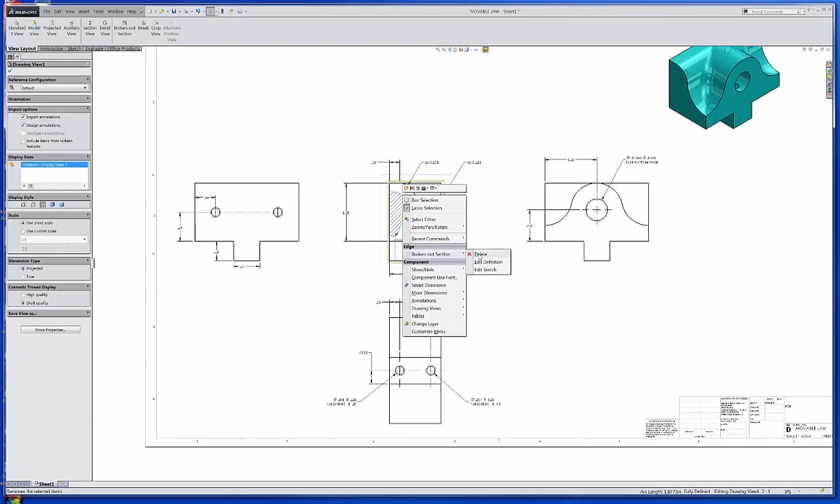So that'll take care of that, and there's a preview. And we can go ahead and accept that, because what I want to do then is I want to change this spline around a little bit. So I'll right click on that. In the broken out section you can delete it, or you can edit the definition, or you can edit the sketch. And I'm going to edit that sketch.

I want to bring that point here down a little bit, and I'm going to click off of that. I'm going to bring it down again. Actually, I'm going to click so that I don't get right on that point. And it should get all the points again, and I'm going to drag this one up. Okay, and accept that. And then this is where it gets fun.

I'm going to have to go in here and edit the sheet format, which messes with that whole thing. But then I'm going to right click on that again and edit the sheet, and it'll come back. Now notice it didn't change the way I changed that sketch, but if I rebuild it, it updates that. So now I can actually see in there and see that, yep, there's that flat bottom.

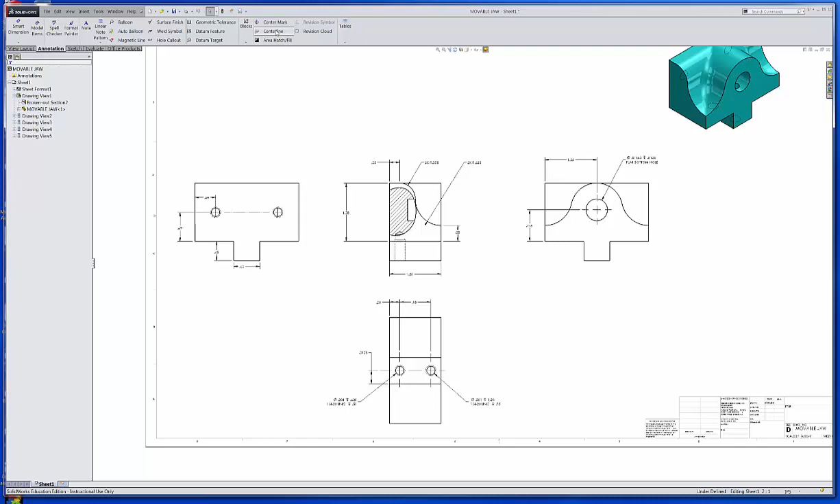So the only other thing is I might want to put a center mark in there. So I'll go to my annotation and I'd go center line here and pick this line and this line, and it'll put that center mark in for me, that center line, and then that probably should be drug out beyond that point there. So that's what I would do on that now.

And if you don't like the way that's done, again, you can just go in there and click on that line, right click, broken out section, edit the sketch, and I'll click on that line. And I don't know, let's see, maybe if we bring this, and that's moving the whole thing, which is fine, but I really wanted to kind of just bring one of them down.

I don't want that to be so rounded. Just go in here like this maybe, and I'll come up here, and what you're doing there, you can change the angle on this thing so it won't look so circular, if you will. And I want to try something here once. I'm just going to hit rebuild, and it comes back, and there you go. There's what you want. So that kind of gives you a little bit better view of that, so you can see into the part.

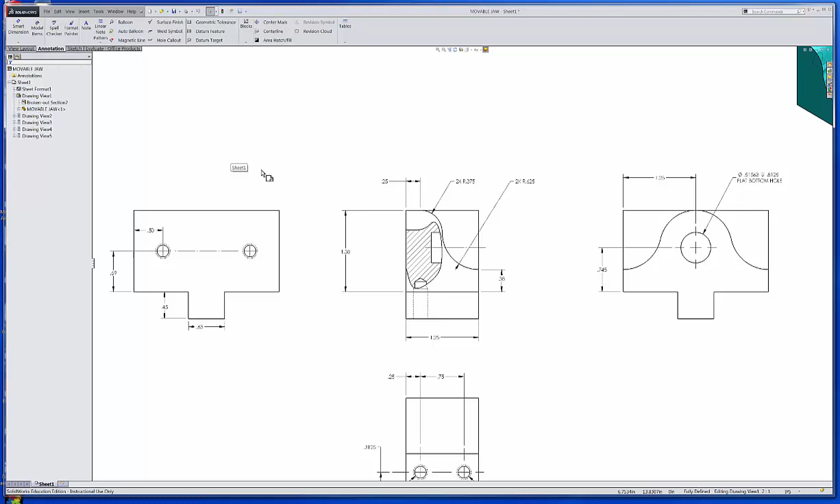So that's what I'm going to leave it at that for now. Now, and let me do just one more thing. Let's say for some reason you had to do a section cut of this piece. Oh, I don't know. Let's say we decided to section.

Well, let's just do a, okay, I'm a view, layout, section view, and I wanted to do a section, except for I'm going to do a horizontal. So over here, notice this is vertical axis. I want to do a horizontal, and I might want to pick right in here somewhere.

And actually, you could probably pick right in the center of that. But I want to come up this way. So I need to flip that. I need to flip those direction. So let's flip the direction there. Okay, and I'm going to do that.

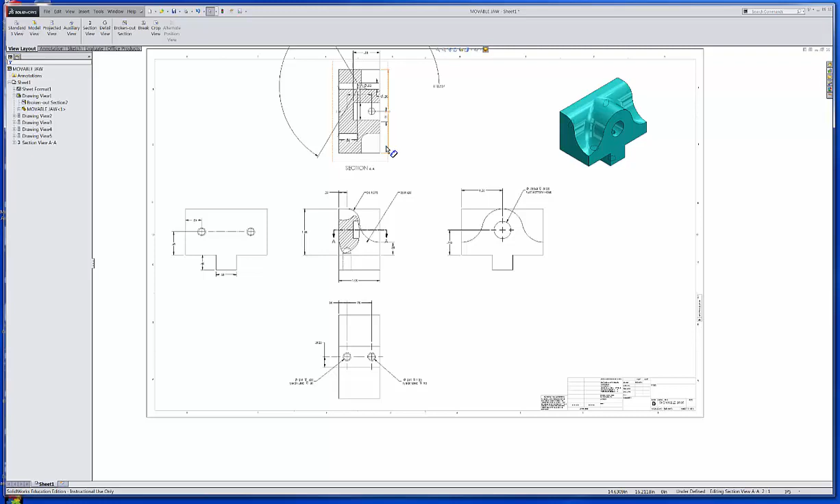So now, my goodness, look at all the different details you got there. You know, I don't need that for that arrowhead and such, or the for the drill point of that.

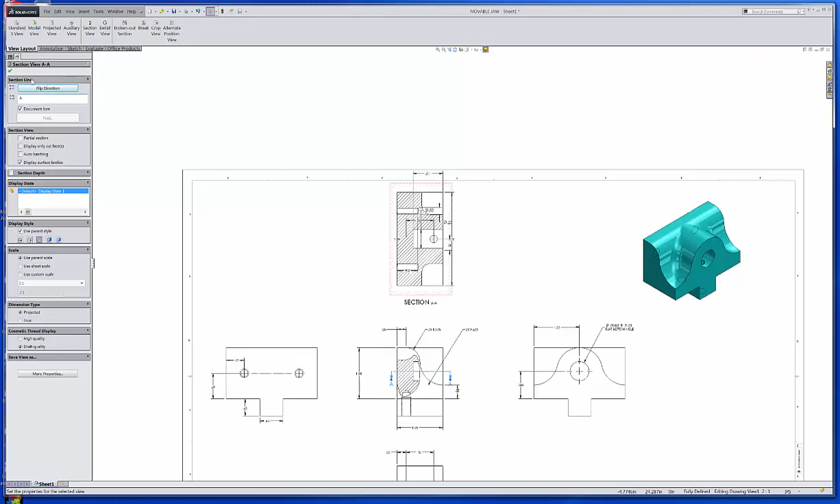And then notice I can move this up if I need to. Let's see. Let me grab that. Now, it might have locked in since looks like it locked in since I went right to that center line.

And it really wasn't what I wanted to do. That's not going to work. I need to come off of that center line. It's not going to let me come off of there.

Let me see if there's something here holding it down. I don't see it. So the easiest way to take care of that is to delete the view. I'll right click on it and delete it, say yes, and do another section view.

Again, it's horizontal, so I'll just put it somewhere in there. Flip the direction - the view should be behind the arrows. And accept that. Then, like I said, I'd take out some of the other stuff.

What I was getting there was this hole, so right through the center. Really, all I'm concerned about is that I don't need any of this stuff in there, and I really don't need that.

Most of these dimensions I don't need. The 2.5 I can leave, but I really don't need to. Or do I need the 0.81? Now, you could, if you wanted to, leave that 0.81 in there.

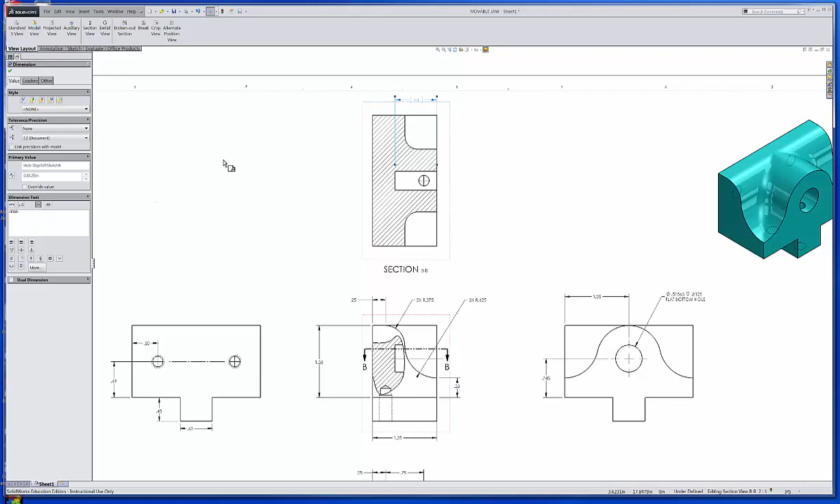Of course, you'd have to get it down below the title block and then put a reference on it. Now, there is a reference right here, so if you put parentheses around it, it makes that a reference dimension. The reason that's a reference is because I've got the 8125 here.

So I guess I ought to really make that a 4 decimal place. So I do that right there. And that takes care of that.

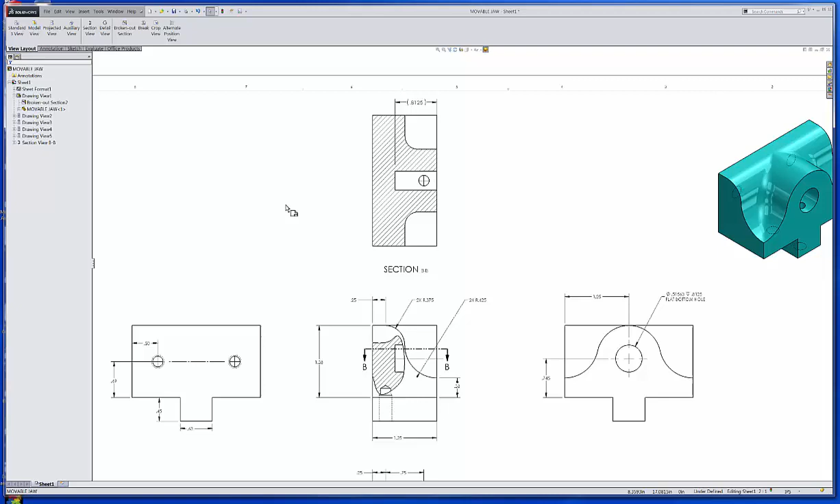Now, the biggest reason I wanted this section view is because I need to call out this fillet right here. So I would go ahead and make that a smart dimension, and I'd probably put it on this right here.

Could not be converted into a line or circular arc. So I guess I may have a little problem there. I thought maybe I could sneak that in at that location, but that's not the case.

But you can see there is a fillet here that I'm going to have to get somehow. I'm going to have to call that out.

I guess the one way I could call it out would be if I called it out just as a general note. I didn't really want to do that, and actually I think I'll leave this like it is, and we'll go ahead and show that.

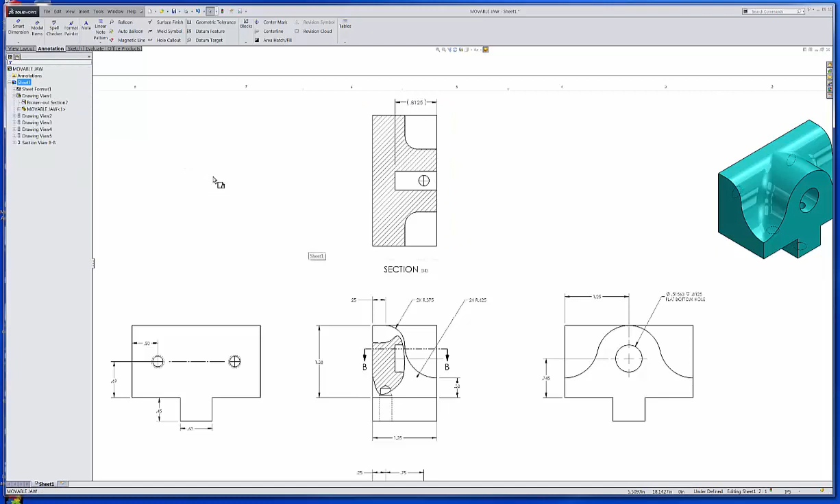Yeah, and then I'm just going to put a note over here on this, and I guess I ought to hit save here since I've done some work.

Note here on section BB - if I double click that, I really want this BB to be the same text height, so that should be 0.25.

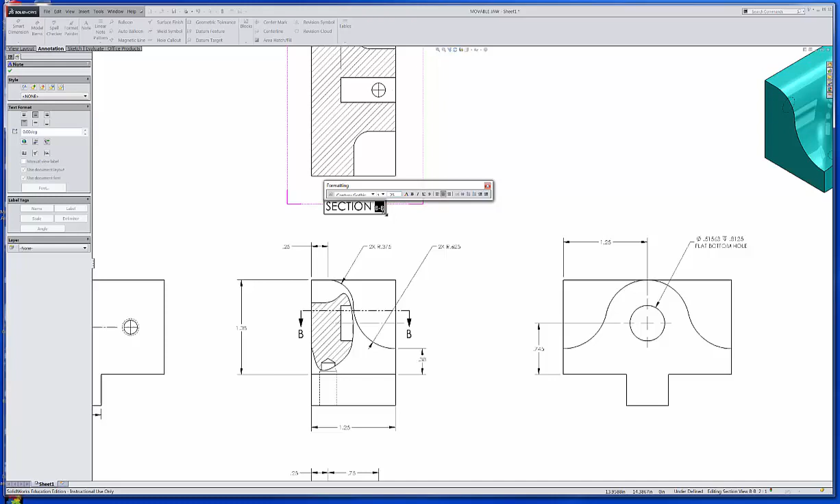Now that looks better. And then over here I might want to move this out a little bit, and I might want to move this out a little bit too, just to kind of clean that up.

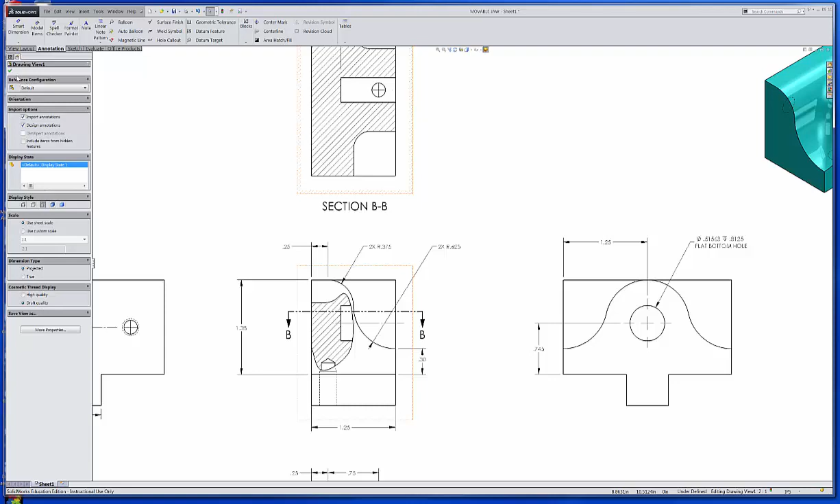Interesting that I got my hidden lines in there. I don't know that I turned that on. Don't know why that's showing up, other than the fact that I'm showing this.

So maybe what I would do then is just put in a whole note, or just some notes in general. So I'll go in here and define a block, and I can start putting in some notes.

That already came up to 156, so I'll just go ahead and type in notes: 1, all dimensions in inches, 2, and then a space or 2.

Unless otherwise specified. All fillets and rounds to be radius of - and the spacing there, I believe it was 0.125.

And then usually we like to put a note in there: break all sharp edges. That just tells people, okay, you really need to break all the edges. You don't need to do too much, but just hit them with a file or a deburring tool.

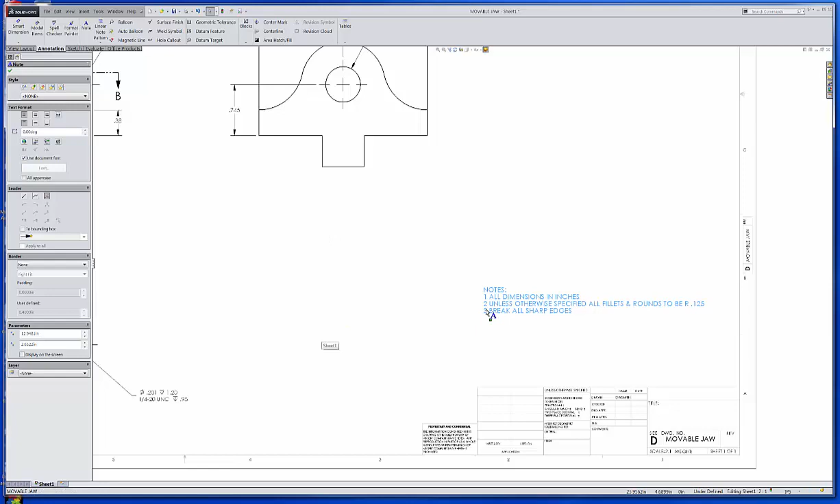So we've got that set up for us, and that's all I'm going to do to that. So that takes care of this radius situation we've got here, and we should be good.

Now, like I said, I would let you go ahead and finish dimensioning this. Note this dimension should never be left in there - you would want it to be outside, like so.

And same thing here, we don't like dimensions to be inside the drawing. That's not supposed to happen. And then, of course, you're still going to have to go in there and fix these center marks.

Pull them down. Don't have to go across here. It's already taken care of, so that's good.

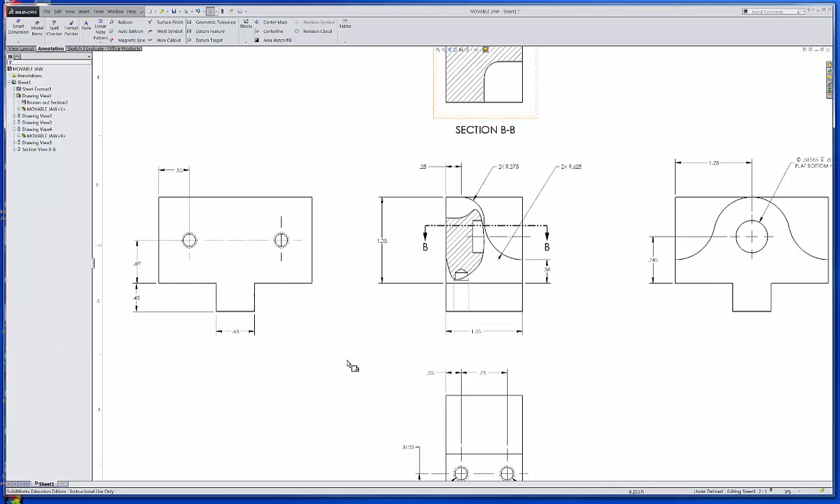You probably ought to show a center mark here now since they're showing this. So that's a center line, and just pick the 2 lines.

Well, I'll just have to go up there and pick this line and this line now, and I'll just hit escape.

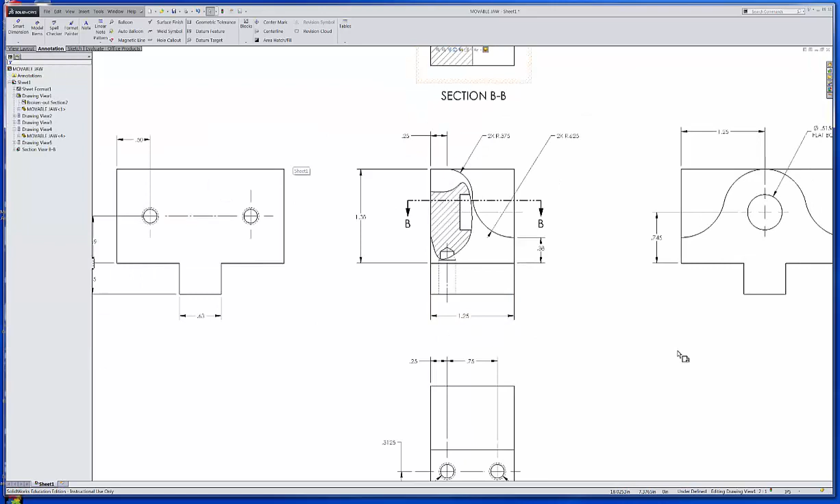Now, if for some reason you didn't have a center mark on the holes - say this one got deleted - the center mark is right here, and just pick the circle, and you should be good on that.

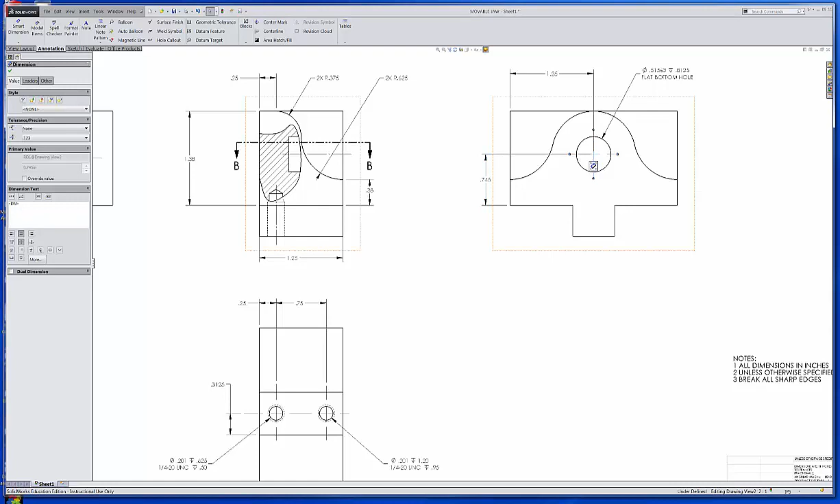Now note, I've got this to pull back out now. And honestly, I don't know why that's giving me that extra line in there.

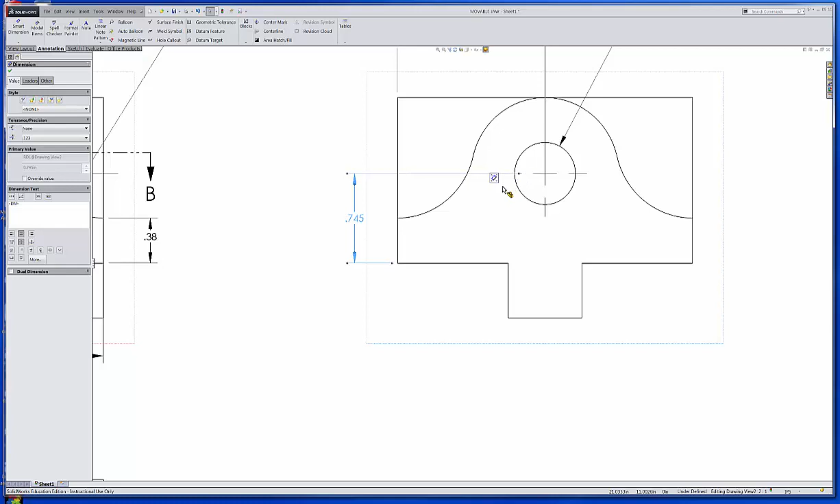Shouldn't be the case. Oh yes, I do - no, it's getting the wrong mark. Okay, so there's that, and then we'll get this one.

Oh, sorry. There, we'll pull that out, and it takes care of it.

Nope, didn't get far enough, did I? So we'll go up a little higher, and that gives us our gap like we need it.

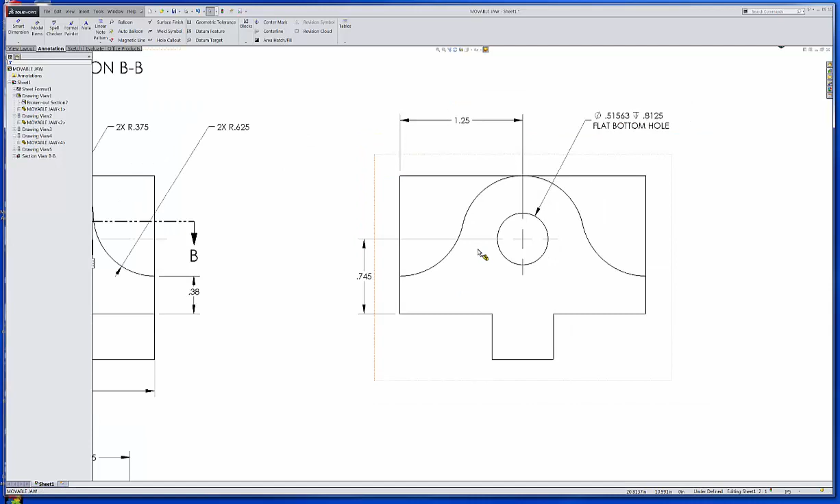Oh, we went too big here. Let's go back and get that diameter, and we'll make that just 4 decimal places. And that's plenty good on that.

So that's a pretty good start on that file. So I'm going to hit save, and then we'll finish this video.